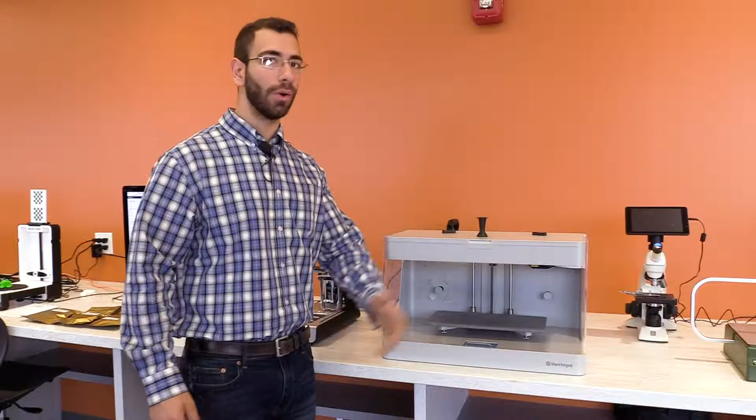All right, so we have the Markforged Mark II 3D printer here with us today. This is a fiber-based 3D printer, and it can print with reinforcement of fiberglass, carbon fiber, Kevlar, and a whole bunch of other strong and sound filaments to support whatever the print might be, from drones that need to be strong and light to a whole bunch of other projects.

Okay, so the first step to every successful 3D print is to make sure that our bed is completely level. And while the Markforged has amazing features, it does not have auto bed leveling. Therefore, we have to level the bed.

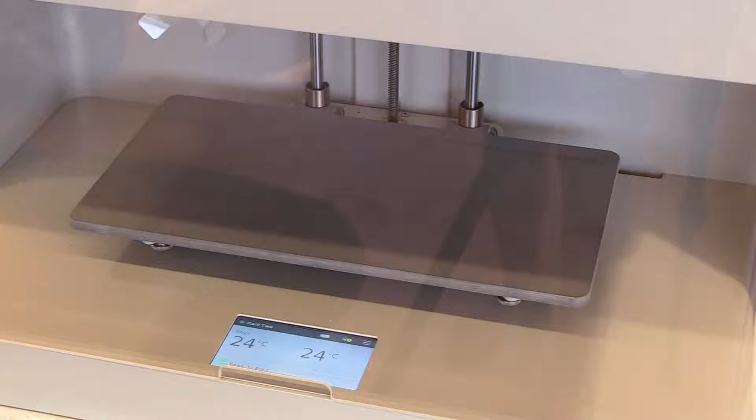So step number one is, whenever we're gonna deal with anything in here, we're gonna need to raise this up. So now, as we can see, this is our bed platform. This is our user interface. Let's go into leveling the bed now that we cleared whatever residue was on the nozzle.

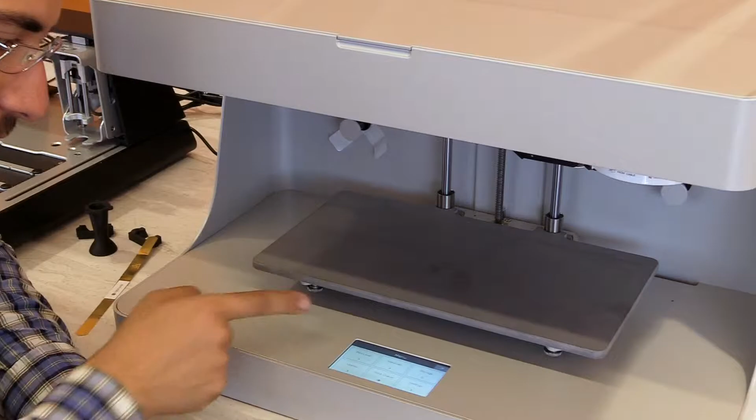So we'll go under our settings, bed level, shim bed level. It's gonna zero itself out. The bed is gonna go all the way up. And it's gonna ask us for our plastic shim first.

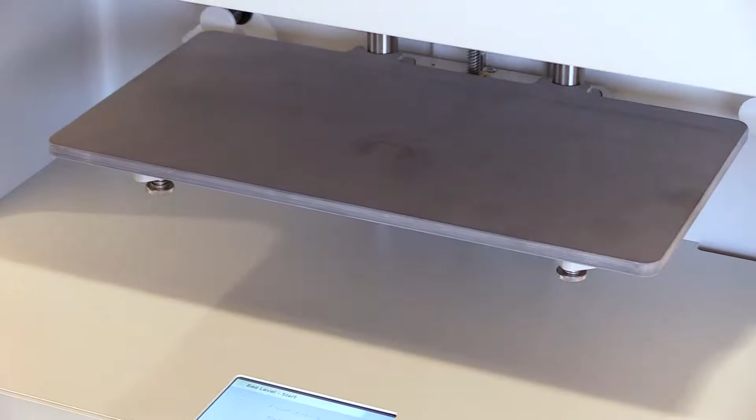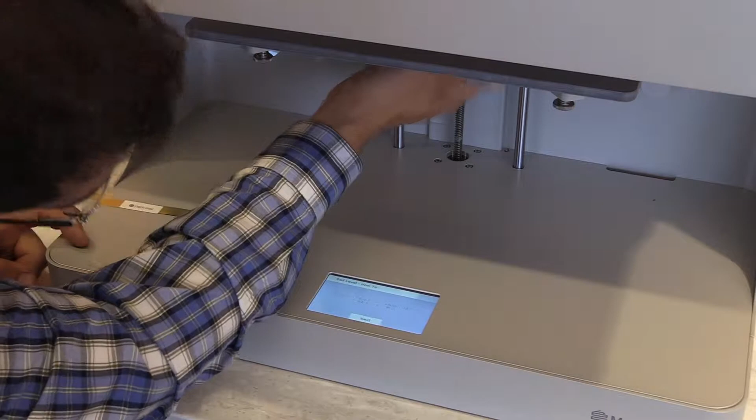So we gotta loosen every single screw to its lowest position. Make sure you don't go too far, because they will come off. You'll see the bed going up and down. You can visually see it. I can see from here how much lower it'll come. And that's about as low as it'll get.

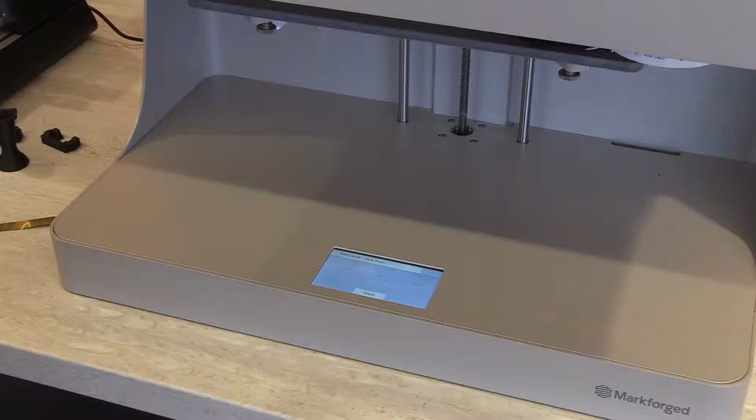Now we'll click on next. So it says, okay, slide the plastic shim between the nozzles. So we're gonna grab our plastic shim. There's two shims, a plastic and a fiber shim. We're gonna have to use both. So we're gonna grab our plastic shim and slide it right between the nozzle and the bed.

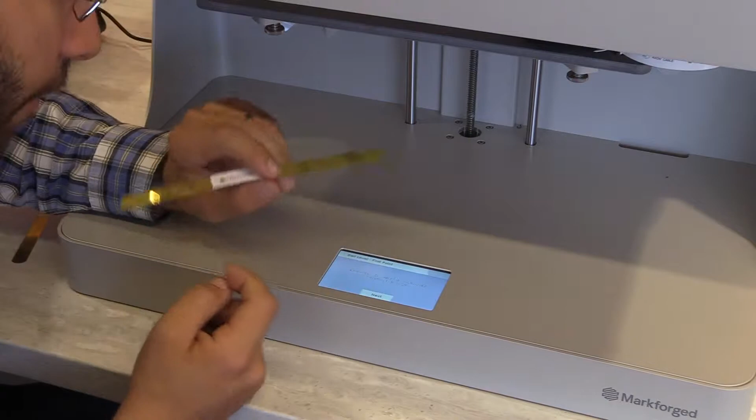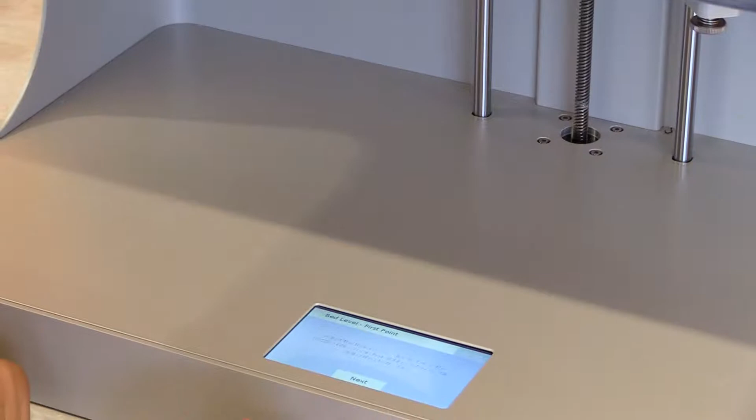Okay, so once we did that, now adjust the thumb screw directly below it till the nozzle can slightly feel it. So what we're gonna do is go clockwise and tighten this as I'm gently moving my shim, making sure I'm not leaning on the bed. I'm just grabbing it from out here and going backwards and forwards so I feel a little bit of resistance. I don't want it too tight that I can't move it like this - that's not good. Or too loose where I don't feel anything at all. I want a little bit of resistance so I know it's in contact.

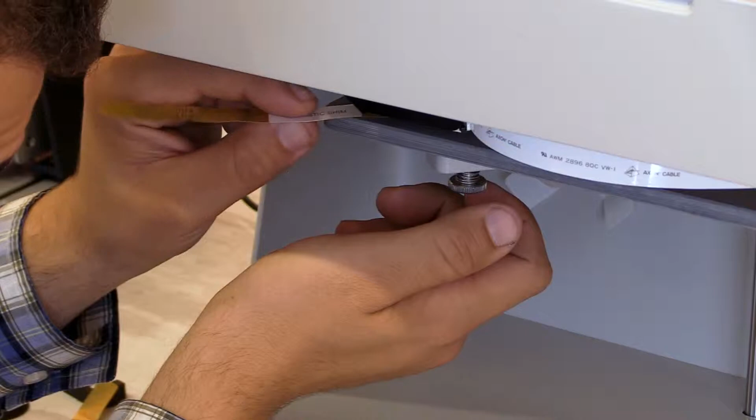Once we have that done, that looks about right. Click on next, it'll go to the next position. We're gonna do the same thing again, bringing this up until I feel some resistance. Right about there, I can feel some resistance. Excellent, we'll go to next.

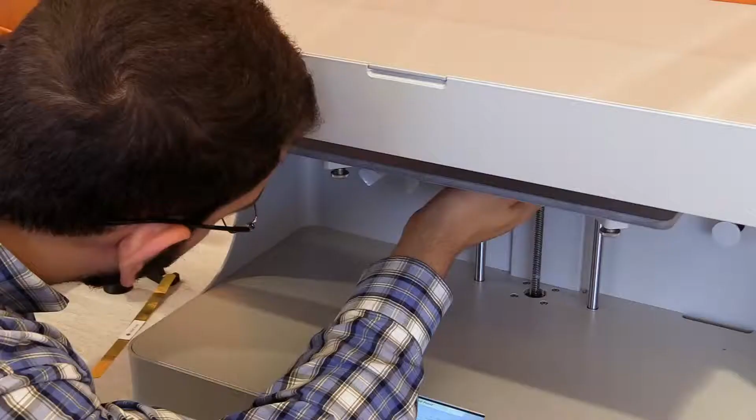It's gonna be a back one. So in this one, just make sure you're coming from the side. That feels about right. Excellent, click on next, it's gonna go back to the first position. It says use the plastic shim to double check everything. So now we're gonna come in here and double check that this feels about right.

Okay, so now we're gonna adjust the fiber shim, for the second nozzle that you can see towards the front - the head looks a little bit flatter. So for this nozzle, we're gonna use a fiber shim, get it right under here, and make sure there is contact. Same method - we don't wanna be touching the bed at all.

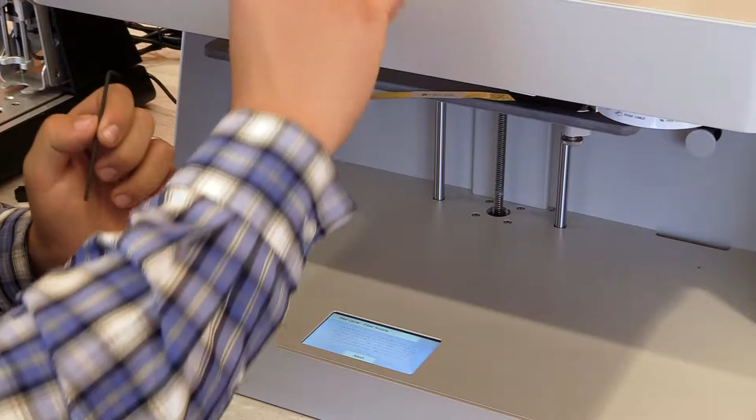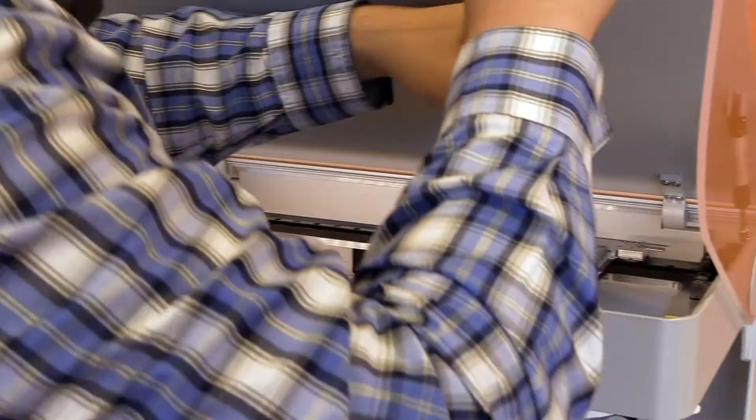Now, I left this adjusted from the last time, but if this did need adjustment, this feels pretty good. But if it did need any adjustment, I will grab the 2.5 millimeter Allen key, and gently lift this up. Now remember, you don't want to let it fall down, so just gently hold it up. And if you can see, there's a screw in here - can we see this? So that's our fiber nozzle Z adjustment, our height adjustment. Then we will adjust that.

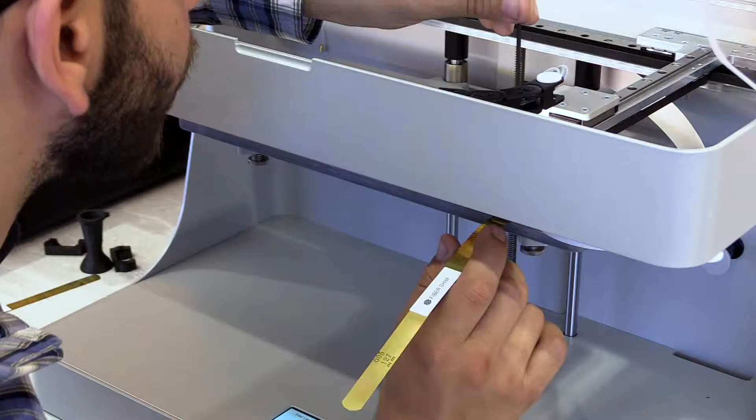We'll put the Allen right on it. And as you turn clockwise, it'll go downwards, and counterclockwise, it'll pick up upwards. I'm gonna keep this on it, just like this. I'm gonna feel this with this hand, making sure there's no pressure on the bed. And I'm just gonna make sure there's gentle pressure. And this feels just about right.

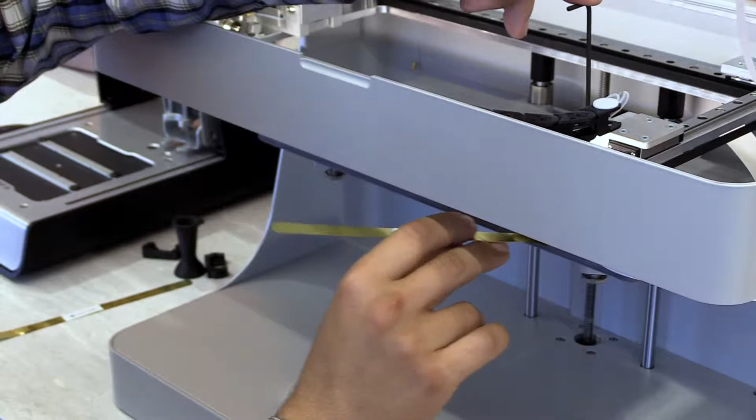So if I needed it to loosen, I would go counterclockwise or towards the left. And if I needed it tighter, I would go towards the right or clockwise. Click on next, it says, okay, use the two shims to check both nozzles, repeat the height one last time. So we're gonna use the plastic shim, get in there, verify one last time that it is in good position.

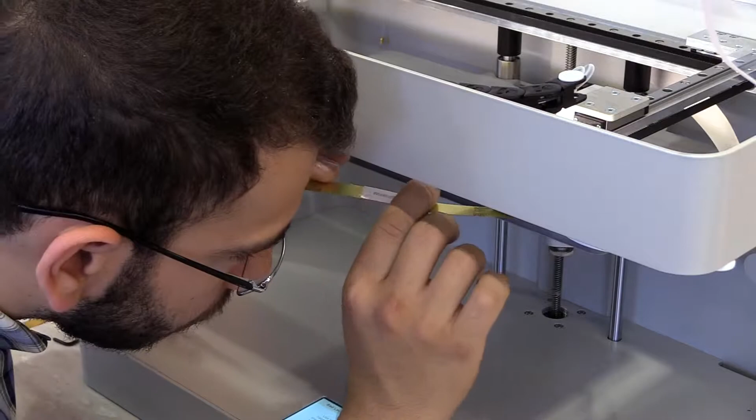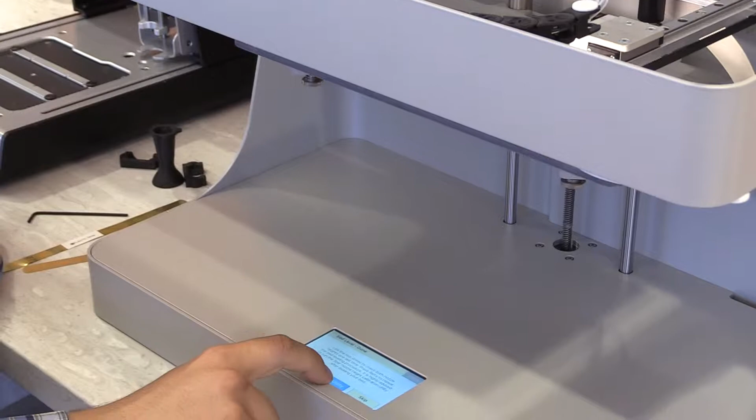Okay, now we are done. So as you can see, the head is going back to its position.

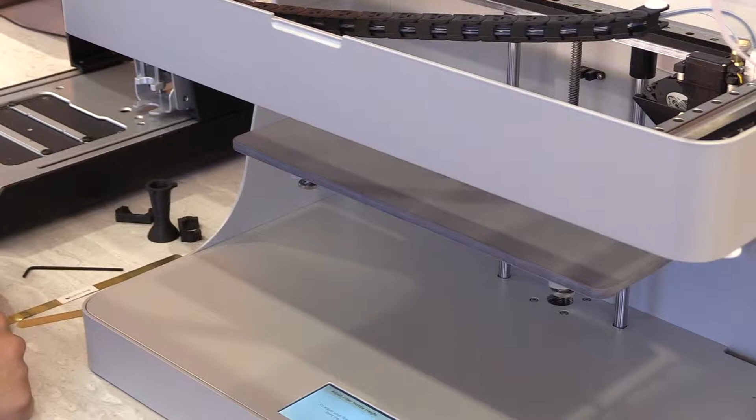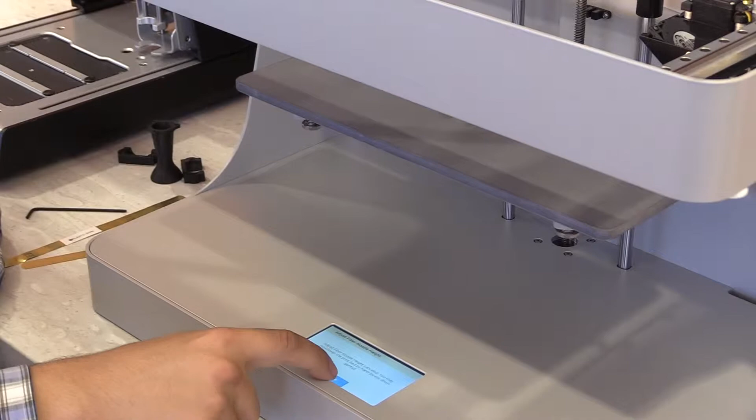It wants us to print the calibration staircase to verify that what we did is correct. Usually we would, but in our case we're not going to do that. Let's trust our work a little bit—it's not a good idea, you should always test it, otherwise you'll waste a lot of filament. But I'm going to keep a close eye on our first print, and if I don't see it going well, we know we have to readjust that.

So what we're going to print is this truss bridge. This part right here is when you select your filament, and the onyx is kind of our go-to filament.

We have two types of filament that this can take: our specialty filaments or our extra support filaments. Whenever you want more structural stability, we would add the carbon fiber or the fiberglass, or depending on what we're working on, different types of support filaments. But our main filament is always going to be the onyx in this case, unless we have something else, such as nylon or something else.

So in this case, we have the onyx selected, we'll stick with that. Our reinforcement material—these will be the other options right here, all four depending on what we install. For this print, we do not need any extra reinforcement material.

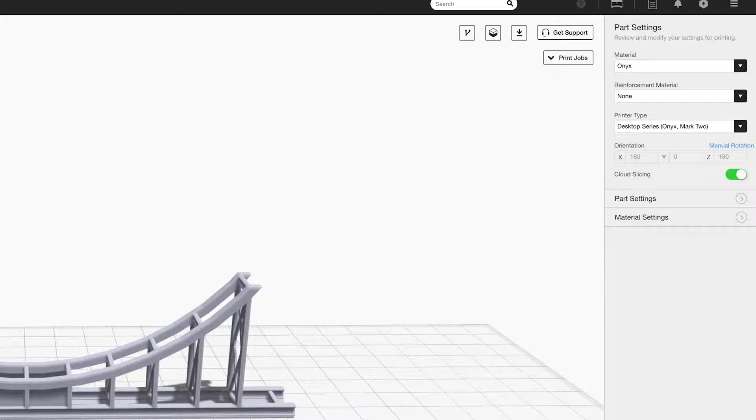We downloaded this from Thingiverse. We just brought in an STL—you can simply import an STL. And once you have an STL in here, you can just go into some basic settings.

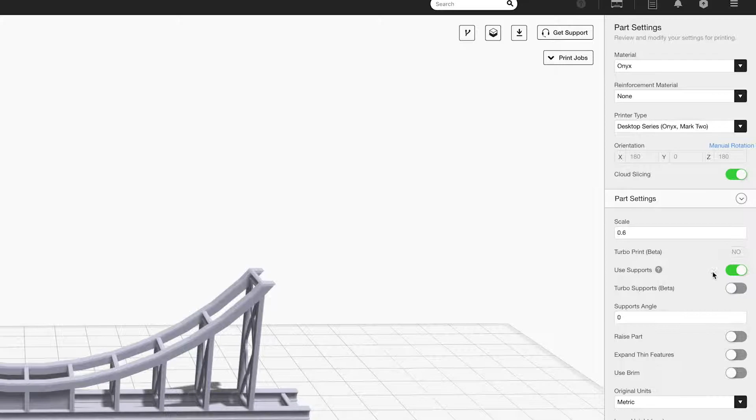Under part settings, I scaled it down by 0.6. Over here, this is how you use supports—whether you need supports or not, you just check the box and that is all. In our case, we're not really going to use supports. So once we take this off, we're making sure we're working with metric units.

I increased my layer height to 0.2. Now you can go between these layer heights—I put 0.2. We don't care too much about quality right now, we just kind of want to show that the print works.

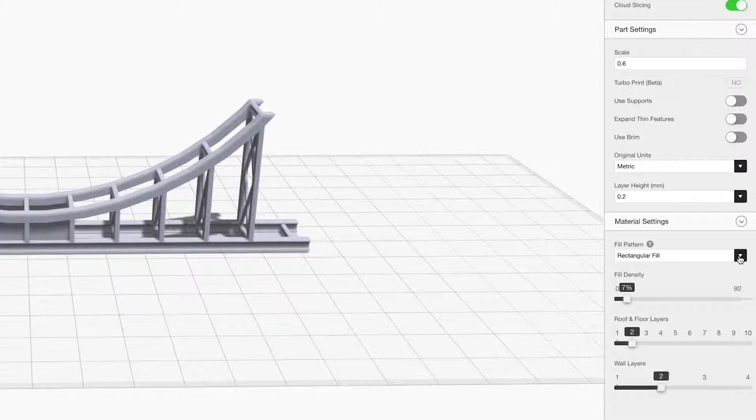Under materials, this is your infill pattern. The nice thing about the software is it'll toggle through separate clips to show you what each option is. So you can see that's rectangular fill, this is hexagonal fill, that's rectangular fill—that's what I'm going to go for because that's the easiest one to work with, a little faster.

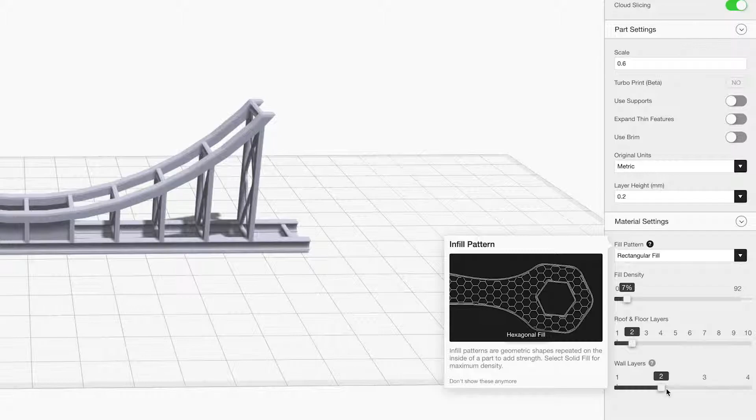I decreased my density to about 7%, I don't want more than that. My roof and floor layers are 2 layers, and my wall layers are also 2 layers. So all around, I'm going to have 2-layer solid blocks all around this print. We want to keep it nice and light.

Now when you click calculate details over here, it'll give you your print time and an estimate of cost based on input value. So we're calculating details, it's going to be slicing—calculating all the additions that we added, making the path of the print, and calculating based on feed rate and flow how fast this is going to print.

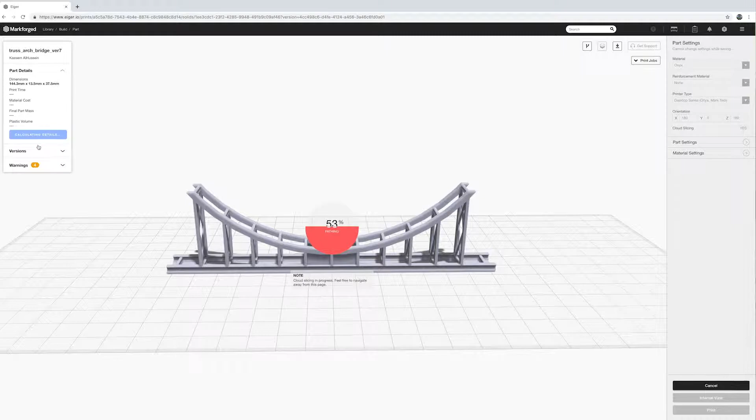All right, so we can see this is going to take us 1 hour and 37 minutes. So we can either directly wire this to our Mark Two printer.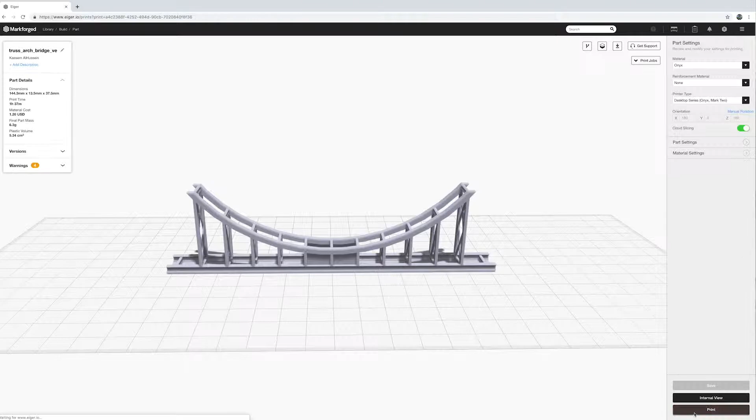So if we click print, it'll take us into this mode where we can either see part view—so we can go back into here and now we can spec everything out—or we can adjust our options again, or you can go into internal view.

In internal view, what it allows you to do is watch each layer and see a little more in detail. If I want to go between layers right here, say from 52 to whatever I'm increasing, I can see the difference in these layers.

So once that's done, we can also go into 2-dimensional, go into a top view, and see the very first layer and increase from there. This kind of allows you to see, okay, what do you need supports for, what looks good, what doesn't look good, and so on.

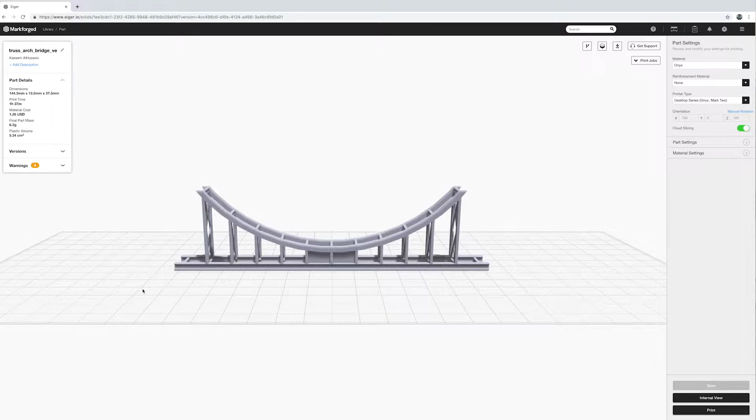So in our case, this looks good. We're going to go back to part view. I'm going to visually inspect this, make sure that we really don't need any supports anywhere around here. I really believe that this will print.

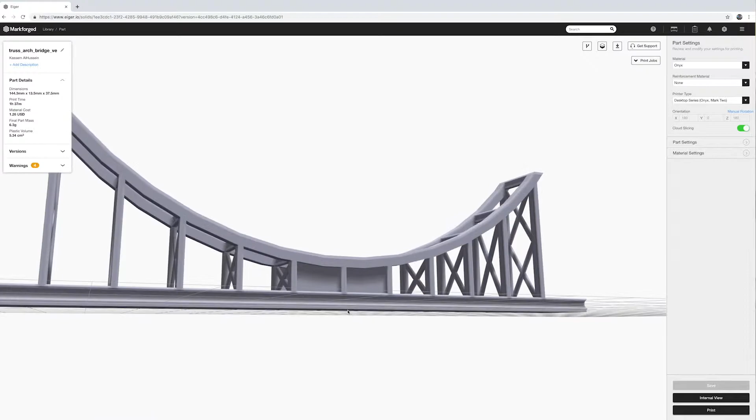There's no overhang really anywhere, and the printer can make this angle right here, this arching angle—it can totally print this. There's no serious overhang, all of this can be printed, it'll make all this arc without a problem. These beams right here will work as our supports.

So once we get this done, we can go into print. From print, we can either export. So when we go to export, I'm just going to get it—okay, so I'm downloading the file right now.

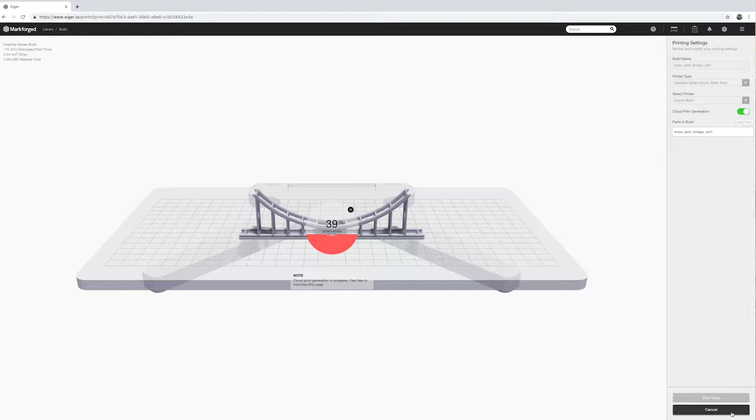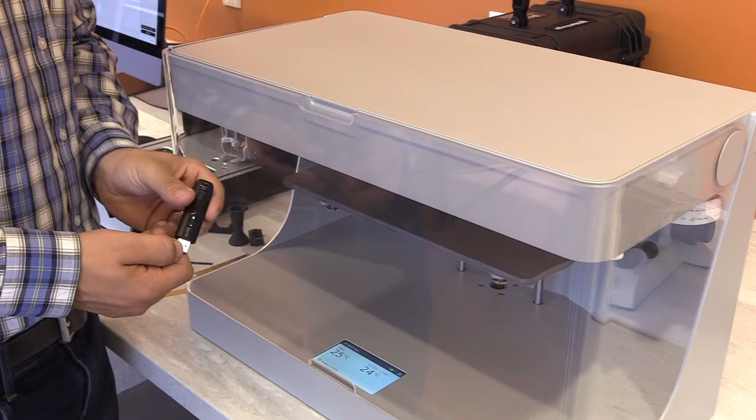Okay, so the file's been downloaded. So now I'm just going to go and install this onto my USB. Now we're just going to put the USB in the back of the printer. Once this is done, we're only going to open this top.

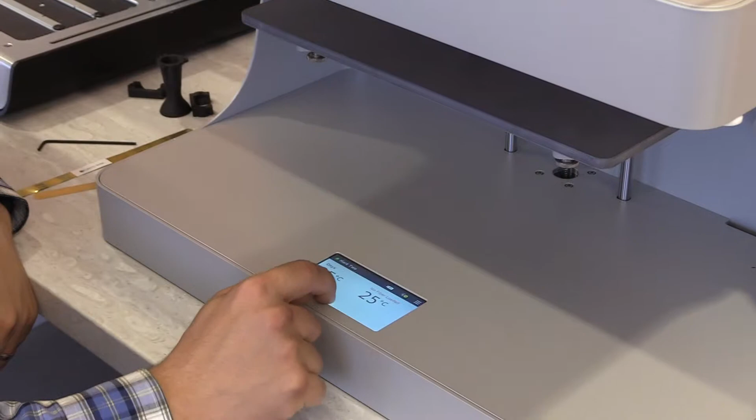We're going to get closer over here, and we're going to go on to the settings option right up here. I'm going to click there, and now we're going to go on to storage—we're going to say print from storage.

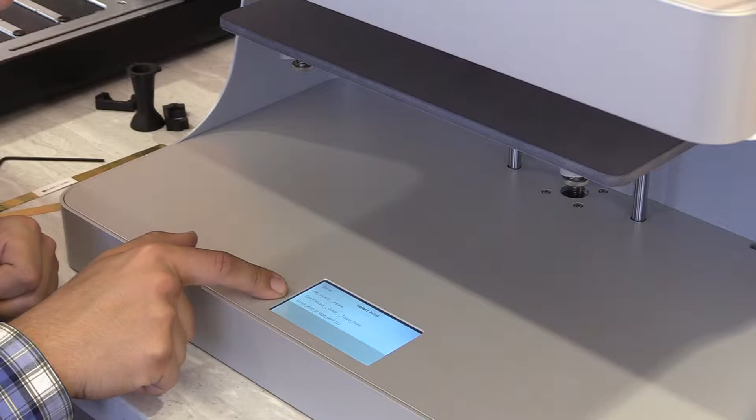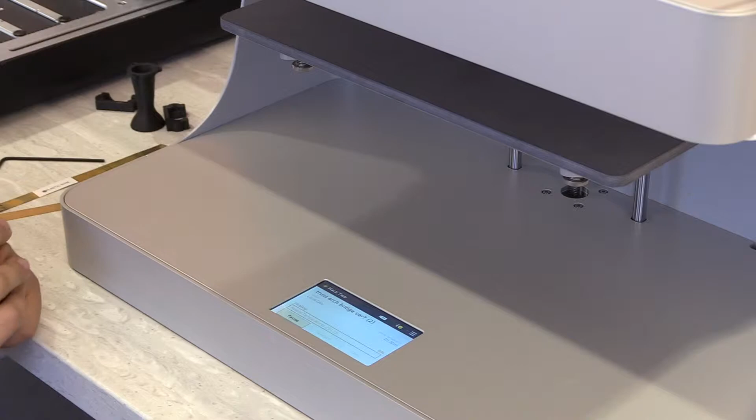Now we have our truss right here, truss bridge. So it's going to be increasing the temperature of our nozzle using our Onyx filament.

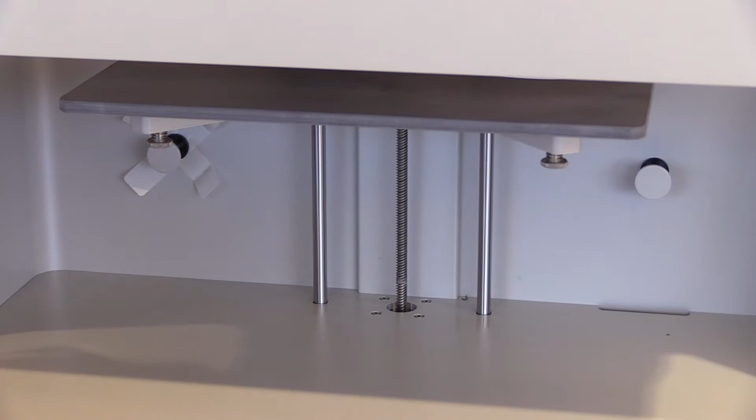So you can see some of the filament already started to come out. What it usually does once it starts printing is a purging process—in case you had a different type of filament in there, it's going to clear it out. So now we're just beginning drawing a straight line. That line looks very straightforward, very nice—so our bed leveling looks okay.